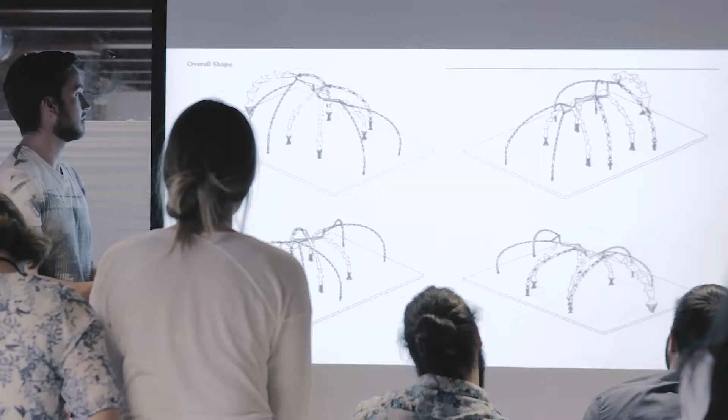They have been working on their themes for their proposals. In line with the computational sessions, we have been running discussions in the studio with each team. Yesterday, on the final day of stage 1, all the students presented their work so far. After discussions with all the tutors, we unified the design goals of each design team and finalized the design of the one-to-one scale prototype that we will be fabricating on the second stage. From this day onwards, the design teams are reorganizing into new teams for the realization of this one-to-one prototype.

Okay, great. See you.

Tell me your group name or number. Group name still? Still, there's no name? We have 'Still' as a number. We are going to say number.

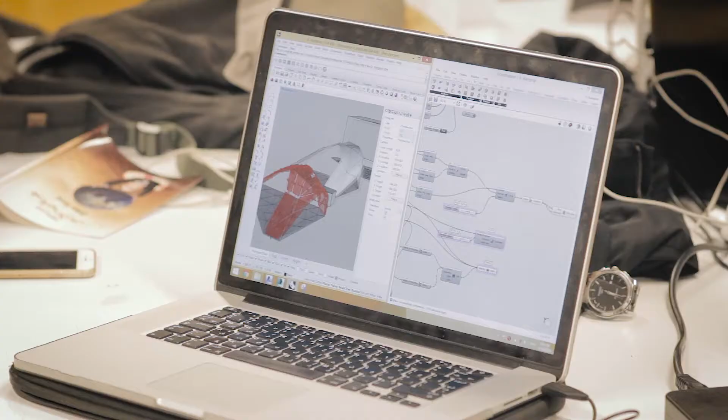9. Before thinking about the macro form and everything, we think about the connection details like this. After we get some critique about it, and after the first jury, we come up with a solution to create curvature and angles, so it's going to be a pavilion.

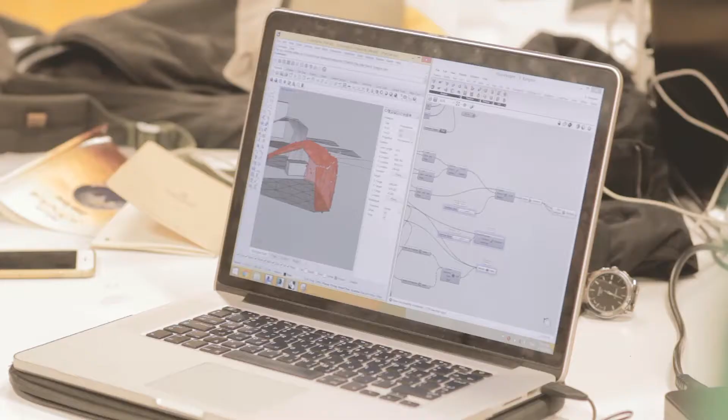We got critique that we need to make circular joint details rather than spherical ones. After that we applied what we learned and the critique to our macro form in Kangaroo and Grasshopper. We wanted the whole shape to be kind of stretched toward the right side, so that it has some kind of inverse gravity, stretching it at the same time toward the right side.

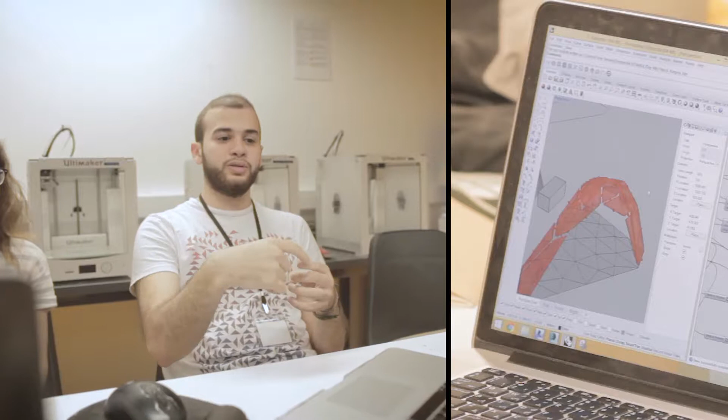So what we did was, for those panels, we made them smaller, we shrunk them down, and we made some kind of connections using those circular nodes to connect the panels together. This will be our structure system to hold up the panels, and the empty spaces between the panels will be used to get natural light into the pavilion, creating a light and shadow effect from the inside.

Construction team - this is a very real thing, we have to be organized. We have to go on the site, and like last year, we need to understand the steps. This is something that most students never go through until they go to an office and maybe go to on-site construction.

It seems quite good right now. They're connecting the two components together using wire and glue. We're trying to fix a small problem, but it's going to work out. So the first thing - this means that C1 is connecting to B1. You can do it over there. By closing it and then having the rail thing again to have a double texture on the surface.

So yeah, we're at the fabrication lab, the digital fabrication lab here at Bilgi. We're about to create our first prototypes for the digital machine, for the analog machine that will work with the digital machine. We have our group here, a special team to work specifically on that part, and different aspects coming together of that machine.

This is the first test with the analog machine. We are testing how fast we can cut and with what kind of precision. It's quite a big moment for the rest of the prototyping fabrication. Fingers crossed.